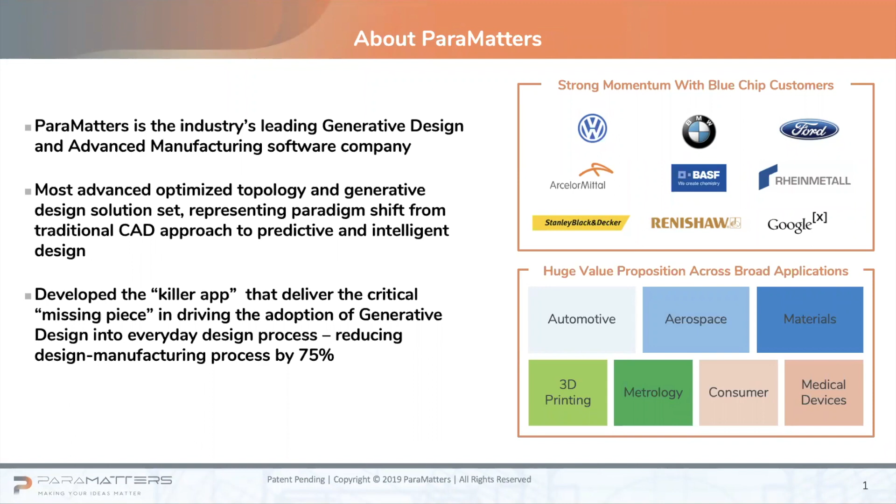We really have developed what I would call a killer app, the missing piece for enabling adoption of generative design. We're going to present today the benefits organizations are seeing from generative design. But what's really amazing is that there's still not enough adoption. I think the root cause has been the fact that there really hasn't been a solution for generative design until today.

A little bit about our team. We have a bunch of smart people, a lot of PhDs and people that come from the industry. We have people from Altair, Dassault, Ansys, Onshape, MSC, and more that really came to Paramatters to focus on generative design and building the best tool.

We have a number of different publications and citations. We are considered the thought leaders in generative design.

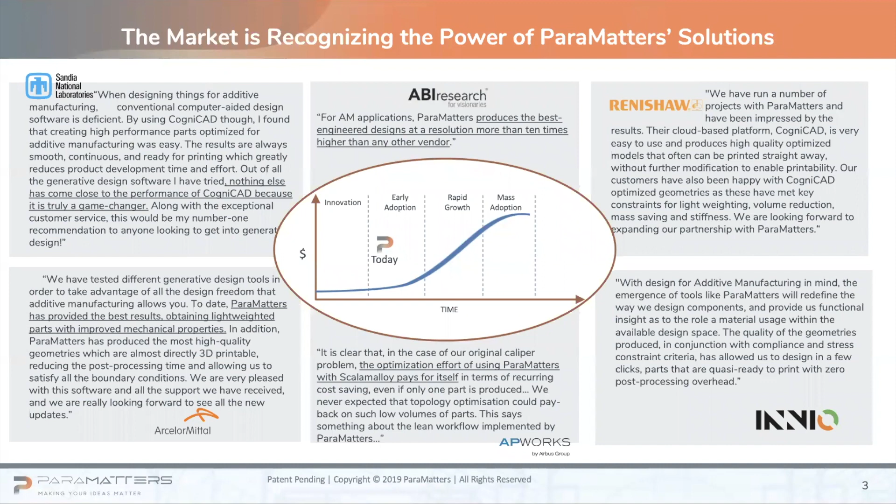We have a number of great customers saying great things about us in terms of what we've been able to do and accomplish with generative design. And we're hopefully going to show you that today.

So you really can't ignore generative design. I've read a lot of articles and been to a lot of presentations where organizations are saying, well, it's coming, this is the future, but it really is today. If you look at some of the analyst reports, they're saying generative design is going to have a compound annual growth rate of 24% over the next 10 years. That's amazing. Reaching a total of 44 billion plus by 2030 and 16 million users.

So in other words, you can't ignore this any longer. This is something you have to incorporate into your design and product development process. The results are too amazing between cost reduction, weight reduction, development time reduction, better yield on manufacturing. What's really interesting is that initially organizations were talking about topology optimization, which added certain value, but there really wasn't a lot of adoption with that.

Generative design is different because it actually creates iterations and variations of designs that can actually be manufactured. That's important, that it takes that design for manufacturability element into consideration. And they're actually designs that you can produce.

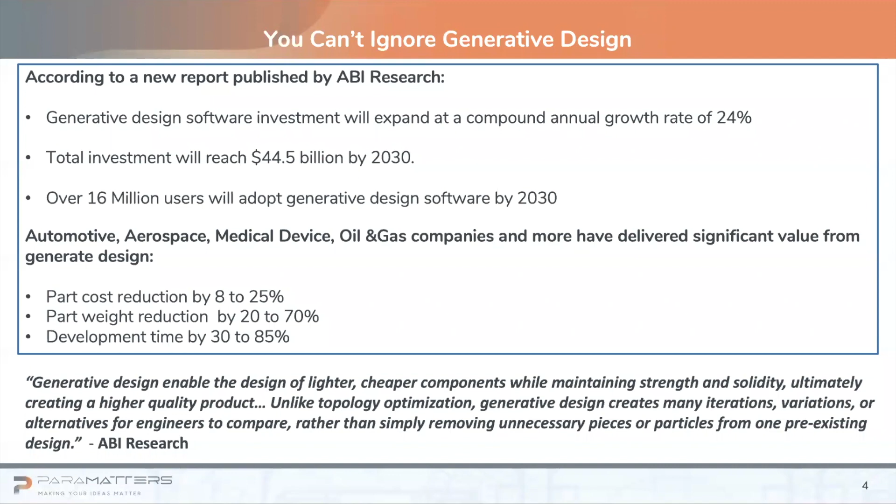So if you look at what engineers and designers are able to do with generative design, they can put in their functional requirements, physical size, material strength, weight, heat, load and boundary conditions, dynamics, et cetera, into consideration, as well as a manufacturing process. They can also consider other constraints, such as cost, availability of material, even supply chain constraints. And that's really important given today's environment.

So the fact that you're able to take all that into consideration, leveraging the technology to help you think through that, this is really a very symbiotic relationship with the engineer designer and the tool. The tool can't function on its own, it really needs the input from the designer to be able to make it work.

But really the end result is that you're able to test new shapes and geometries very quickly, do different types of parameter studies, easily come out with detailed designs for engineering and manufacturing. And not just for new designs, we're seeing a lot of applications where organizations can do product improvement, take existing designs and figure, okay, can I lightweight this? Can I use a different material type to manufacture? Can I manufacture in a different way to reduce cost? So it's not just on new designs.

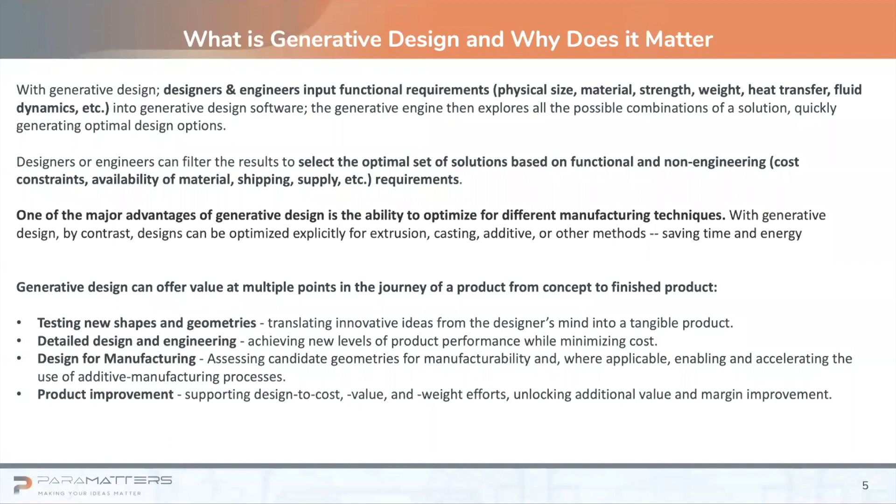Some of the value that's being derived from generative design is being able to use less material, less energy, in additive manufacturing and other manufacturing processes. You can do a variety of different design studies, varying different parameters, including materials, which is one of the parameters we're going to show you today. And basically, transforming the productivity of every engineer in the organization.

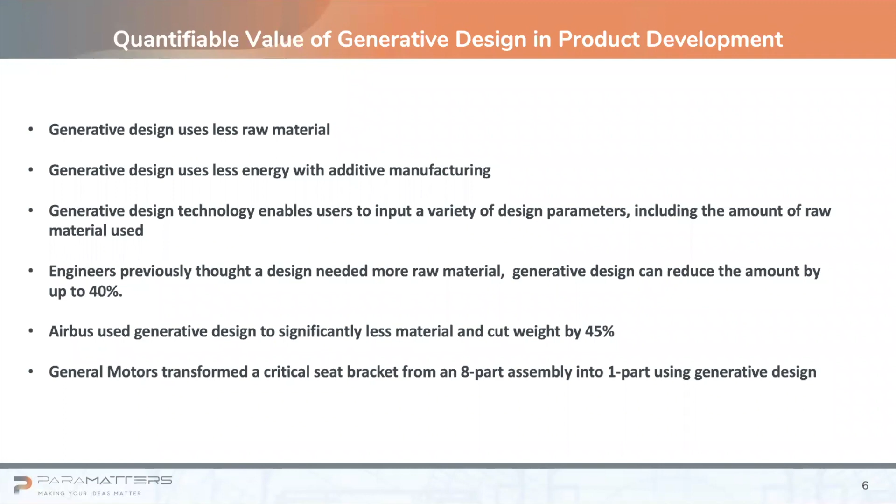Some examples: Airbus used generative design to reduce material and cut weight by 45%. GM took a seat bracket, an 8-part assembly, and cut that into one part. We'll go into a little more detail in the next slide.

Here's an example: a seatbelt bracket made up of 8 parts from 8 different suppliers. GM was able to use generative design to turn it into one part, which could come from one supplier, making it 40% lighter and 20% stronger than the original. Those are really transformative results.

Black & Decker took an overhead tool that was heavy and reduced the weight by 20%, taking the manufacturing time from a month down to 20 hours. GE took a bracket and reduced the weight by 75% while maintaining structural integrity. So these are the type of transformative results that can be achieved with generative design.

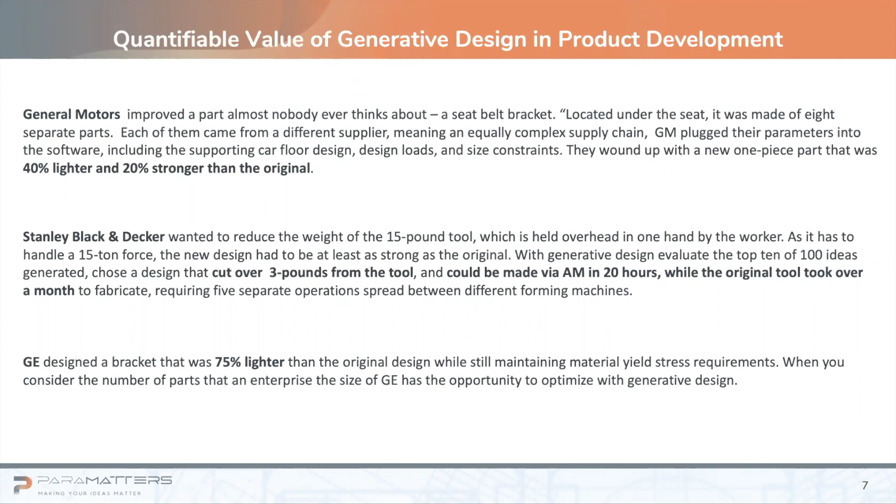Here's some other examples of parts and components that have been optimized with generative design, and some of the results.

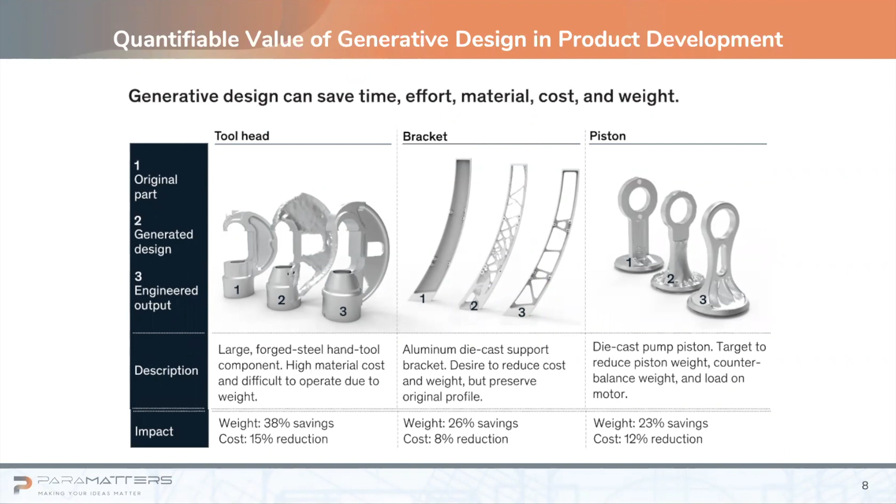So it's really a must-have solution. It's one of those things you just can't ignore anymore. And it's not just us saying this - it's industry experts, ABI, McKinsey, where it's going to allow you to improve sustainability and profits, and explore different designs and materials in a very unique and powerful way.

It streamlines the design through manufacturing process. In other words, because you're taking manufacturability into consideration, as well as the loads and boundary conditions and structural integrity, this truly enables engineers to think about designs in a different way, considering manufacturability and structural integrity together. You're seeing as much as 80% productivity gains in product development.

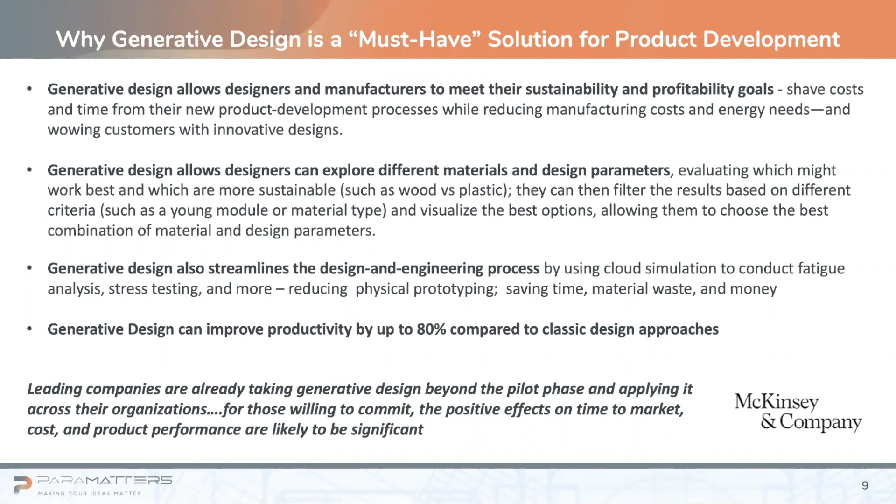So why hasn't this been adopted more widely? Mostly it's because the tools out there have been more centered on traditional simulation and traditional topology optimization, since that's the providers' core technology. So it was really hard for them to think about generative design in a unique way - they had to build off their existing technology base, which really wasn't built for generative design.

So ParaMatters and CogniCAD is the first solution designed for generative design, incorporating AI and machine learning algorithms to enable geometry optimization combined with structural integrity and manufacturability. It's intelligent, automates a lot of the steps, so it's very easy and intuitive to use. It integrates design and manufacturing, and it's CAD and CAE agnostic.

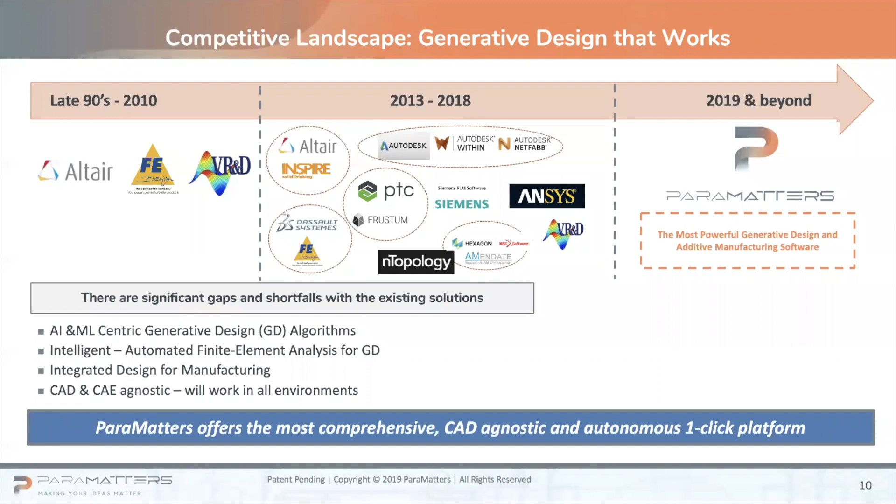In other words, you don't have to change your environment - you can work with the tools you have today, and this is an add-on that gives you that generative design option.

So what's in it? Basically, we have structural, mechanical, static and vibration simulation, along with thermal, taken into consideration as you're creating your design. This happens in parallel with developing the geometry. You could basically take any geometry from the CAD model and apply generative design to it.

Again, it's CAD agnostic - it can be an existing part that you now run through generative design, or it can be a lump model where you say, here's my loads and boundary conditions, here's my design objectives, go figure this out for me. So it can work in a variety of different ways.

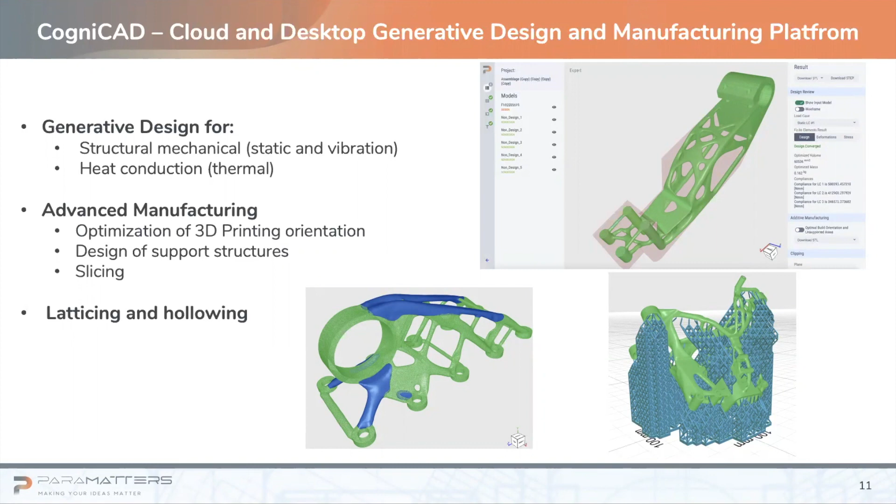It's designed to take advantage of advanced manufacturing, and enables advanced manufacturing in terms of lattice and structure support.

Going into a little more detail, you can see some examples of how it works on the right. As I said, AI and machine learning algorithms incorporate structural vibration and heat conduction. It's a pure mathematical approach, and Michael will talk a little more about that when he shows you the example.

It's very lightweight, providing this type of capability in simulation very, very quickly. We've done generative designs live during a demonstration in 30 minutes or less. That's another unique element to this - it's not a heavy duty application, it was built to be fast, lightweight, and smart.

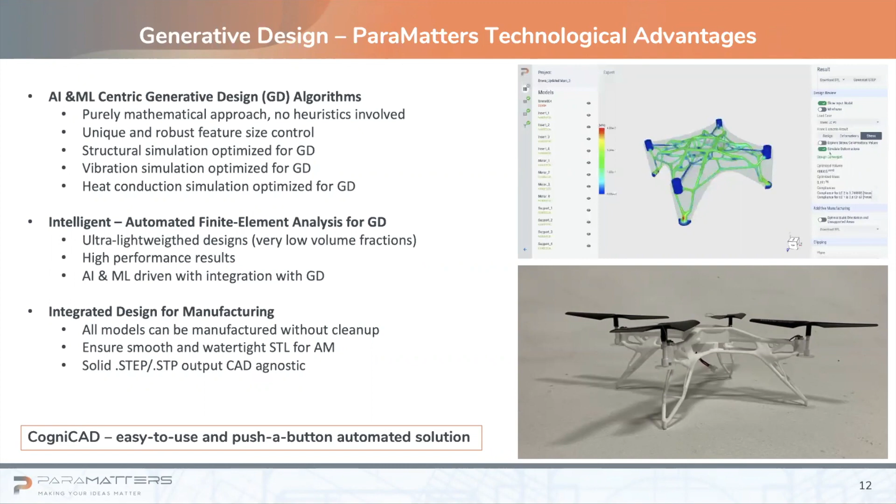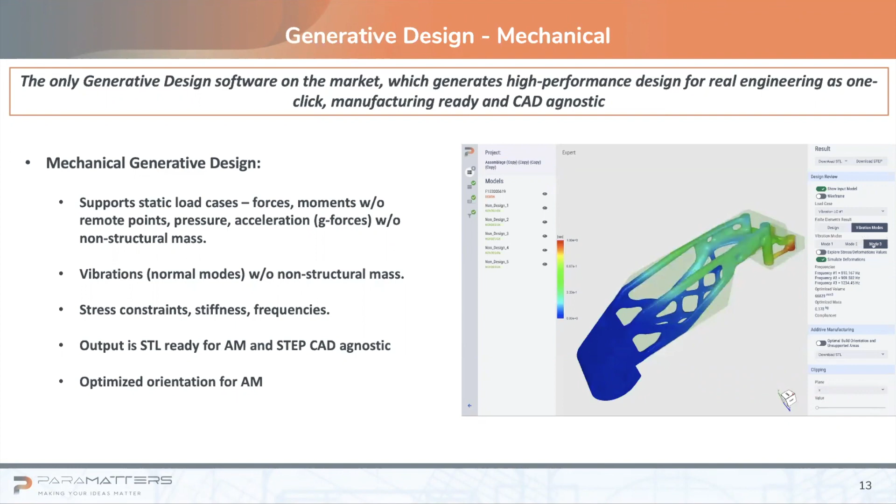Going into more detail in terms of what it does with the structural piece, it can also output for manufacturing, whether it's a step file or STL for additive manufacturing. If you have additive manufacturing, it's really designed to be optimized for that.

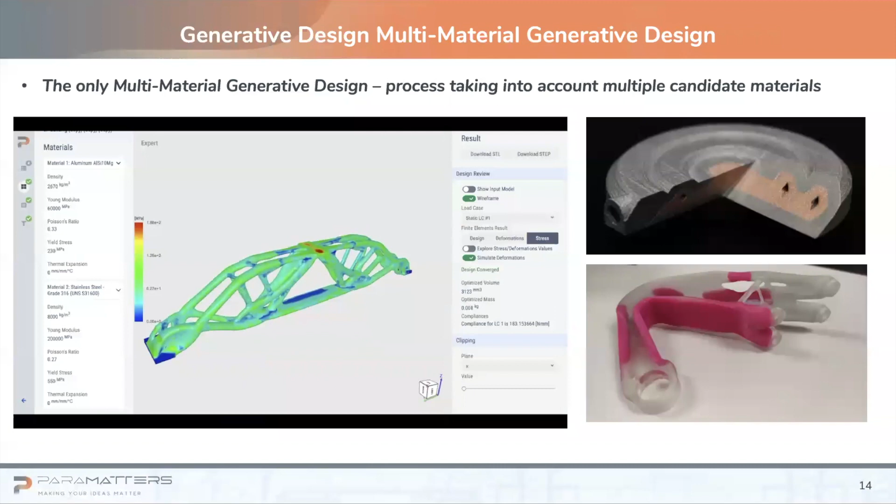The other thing is that we take into consideration multiple materials, which is unique. No one else is doing that. So this way, if you're incorporating designs and want to get creative, you can apply different material types into your model, and we're able to solve and design for that. Again, very unique, very powerful.

As I mentioned, we have additive manufacturing, where we can produce the models for additive manufacturing, output to an STL or PLY file, and build the lattice structures and support structures automatically. It's really designed to optimize that as well, so you actually reduce the material requirements of your additive manufacturing solution. But we also support other manufacturing operations as well, not just additive.

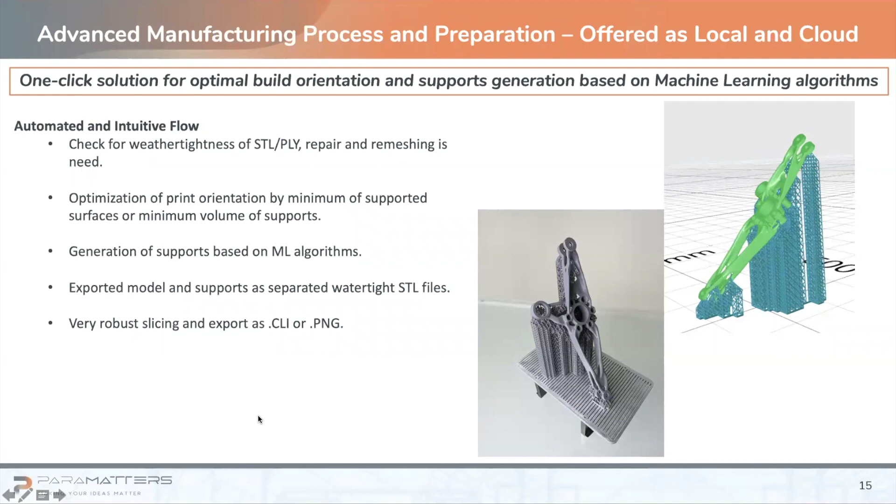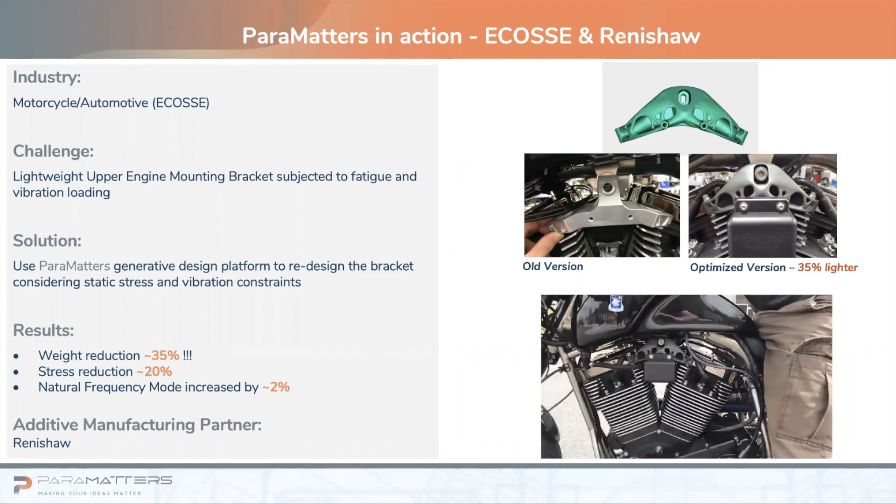Just getting into a couple examples, and then I'm going to turn it over to Michael to show you exactly how it works. This is a redesign of our bracket for ECOSSE, where they wanted to lightweight a mounting bracket and think about fatigue and vibration loading as part of the design consideration. They were able to reduce weight by 35%, stress reduction of 20%, and the natural frequency mode, they actually increased that as well. The part was produced by Renishaw.

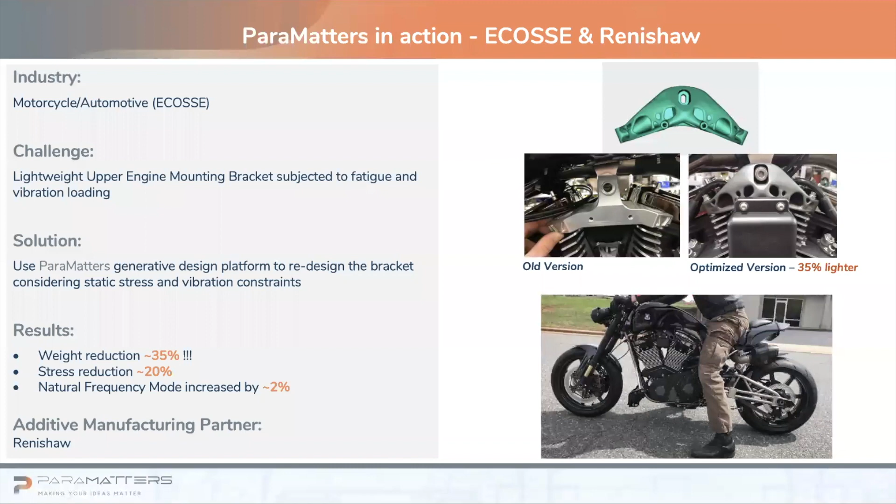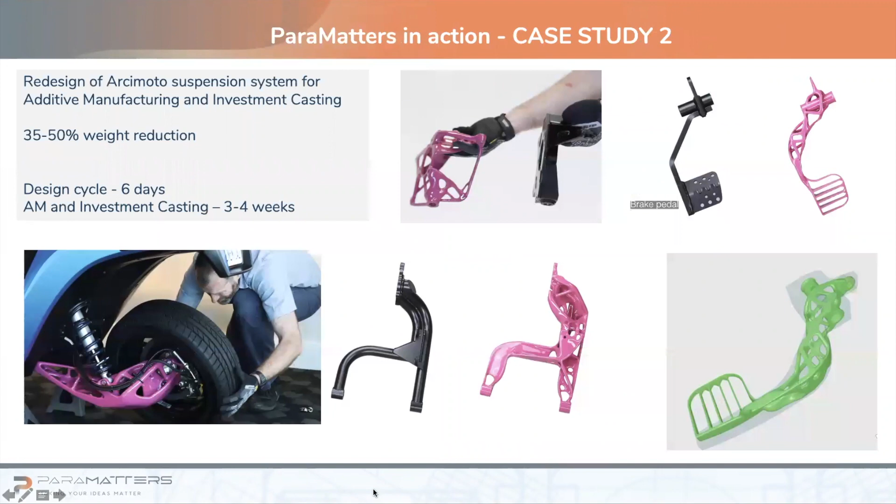An example where we took a suspension system, cut the number of components in the suspension system, reduced the weight, reduced the design cycle by over a week, and produced this for investment casting.

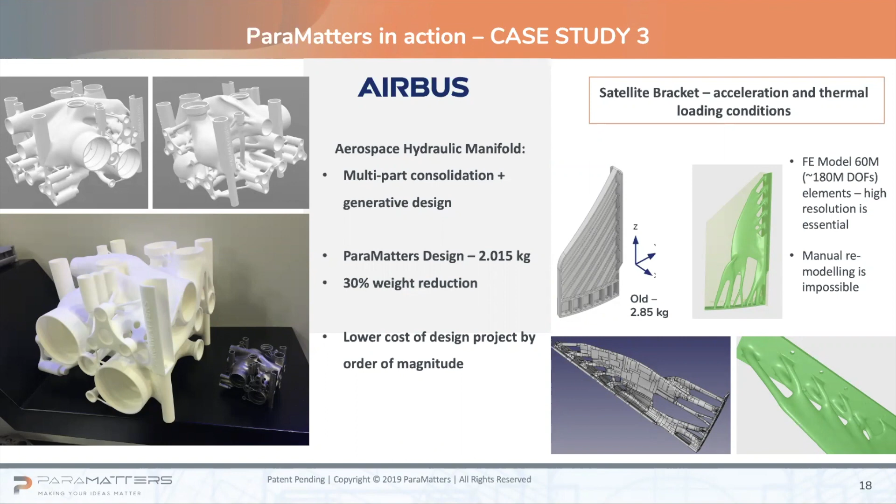Here's an example from Airbus where they're doing a hydraulic manifold. They want to do part consolidation here as well as lightweighting. Obviously, structural integrity was important, so they had to maintain that, and they're actually able to lower costs of the design as well.

At this point, I'm going to transition over to Michael, and he's going to take you through a real example of one of our customers and how we transformed one of their machines. Michael? Yeah, thanks Ed, good morning everybody.

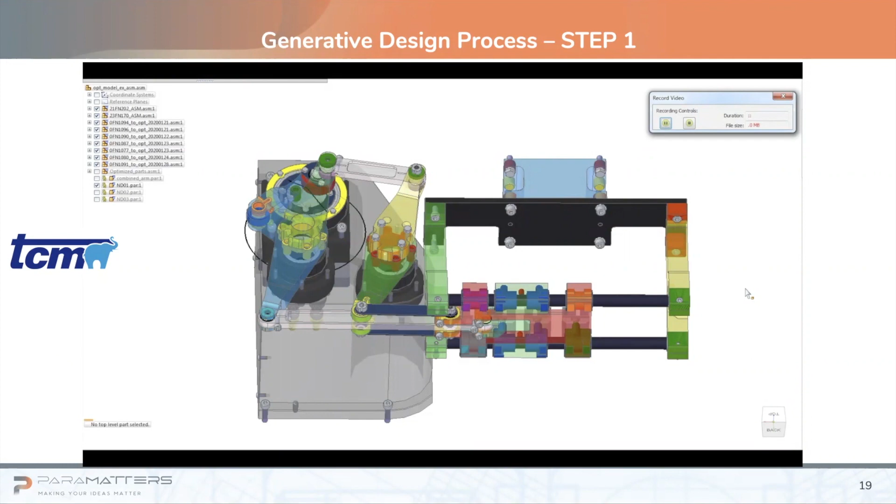I would like to show the unique process taken from the machinery industry with our customer TCM, an Italian machinery company. To briefly explain what happened here, we got an assembly of the machinery, and we immediately identified many candidates here for generative design. When we talk about generative design, as Ed mentioned, it's not only lightweighting, it's also part consolidation when we combine generative design with additive.

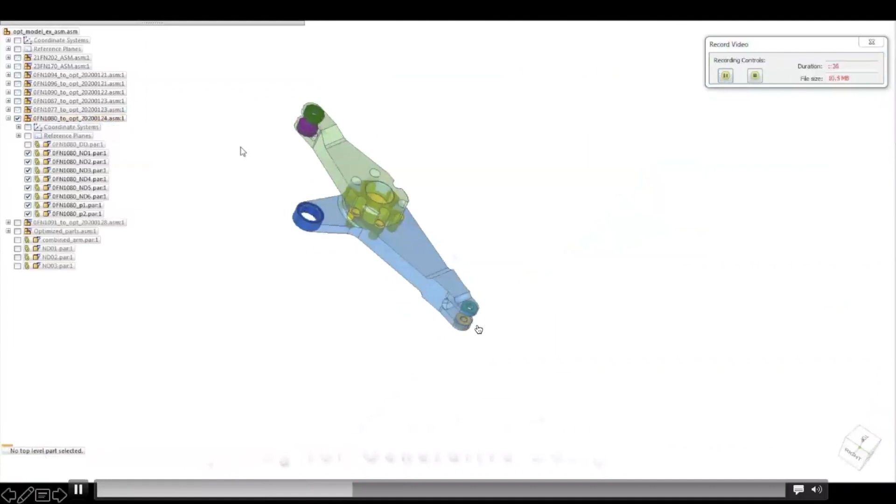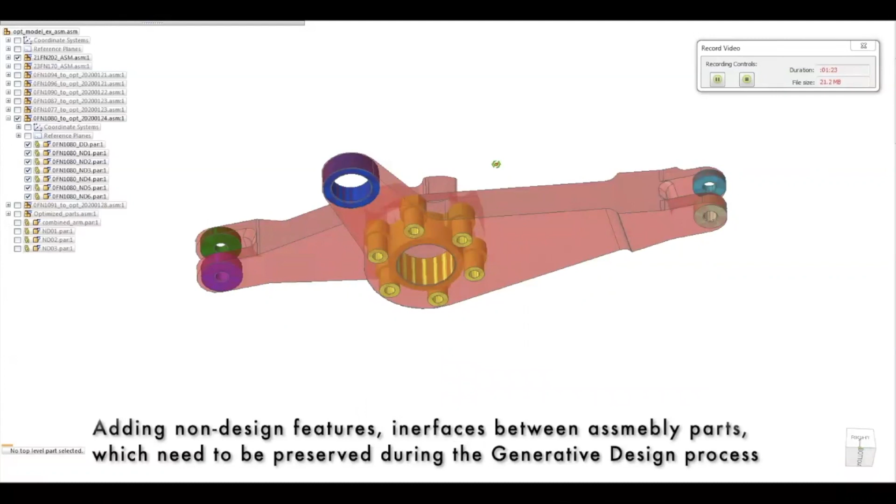Let me quickly jump back here. We identified, for example, these two components, and it's clear that instead of having two parts, we consolidate them. In CAD, this is a very simple operation. We can create what we call a design space. Now, what is also important in generative design, each part or component we design is part of an assembly, so we need to keep interfaces untouched - what we call non-design.

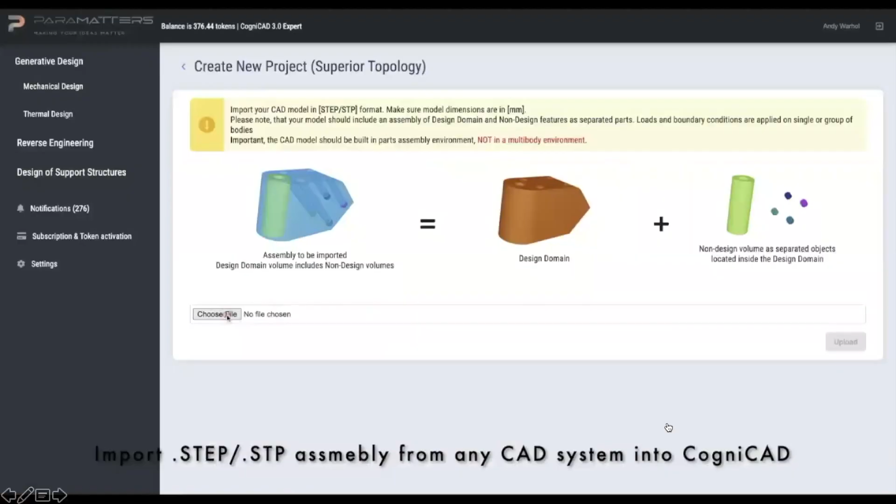So basically, the user has to take his CAD and import it as a STEP file into our process - very simple. After that, you go to CogniCAD. This is the CogniCAD interface, our software, and you just import this STEP file assembly into our platform. The process is very intuitive and easy to use.

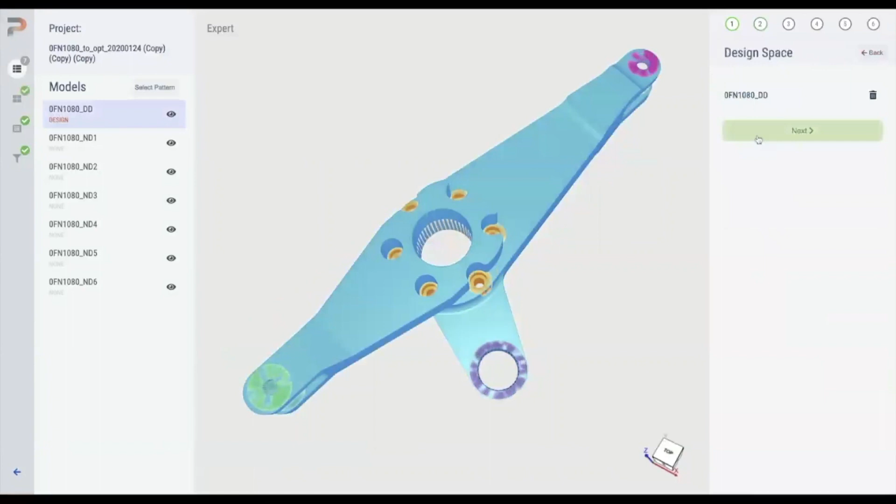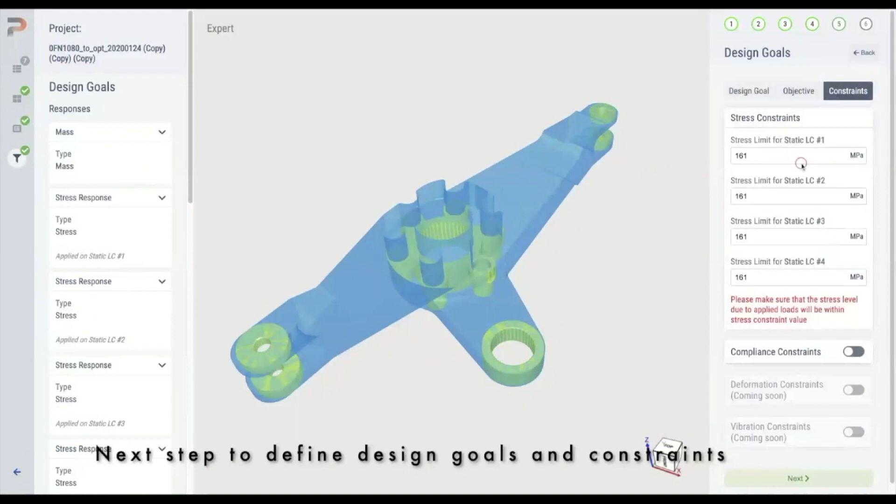Let me just stop it here in the show. There are very intuitive steps. First is to define the material type we would like to use, with basic parameters. Then classification of the design space, some non-design features - basically what we want to keep untouched by the process. And we apply various loading conditions. As Edward mentioned, this can be static, free vibration modes, or other load cases like thermal. When we talk about loading conditions, these can be forces, moments, pressure, acceleration loads, and so on.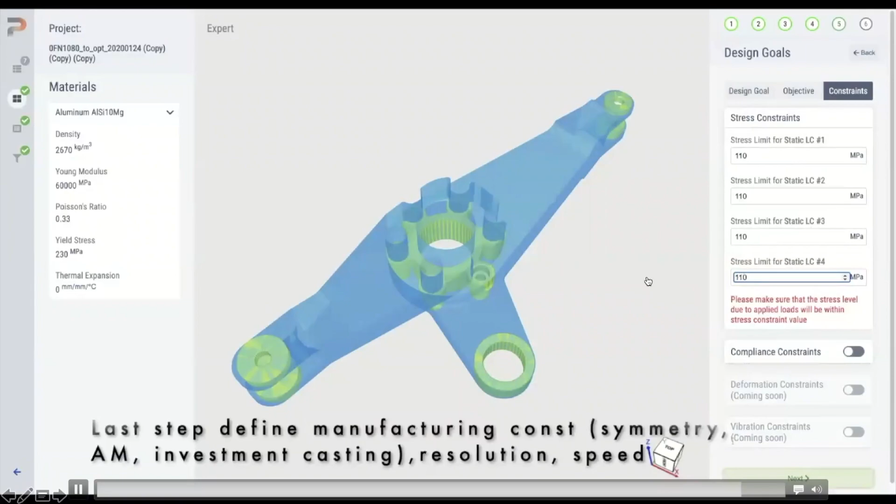And the design goal, which we would like to define in this case, is to say okay, if this part is made of aluminum, we want to keep stresses below yield stress, or if it's a fatigue application, we would like to have some safety factor. For instance, we put a safety factor of 2 here, and we define our requirements, and the software provides the final design as you see here.

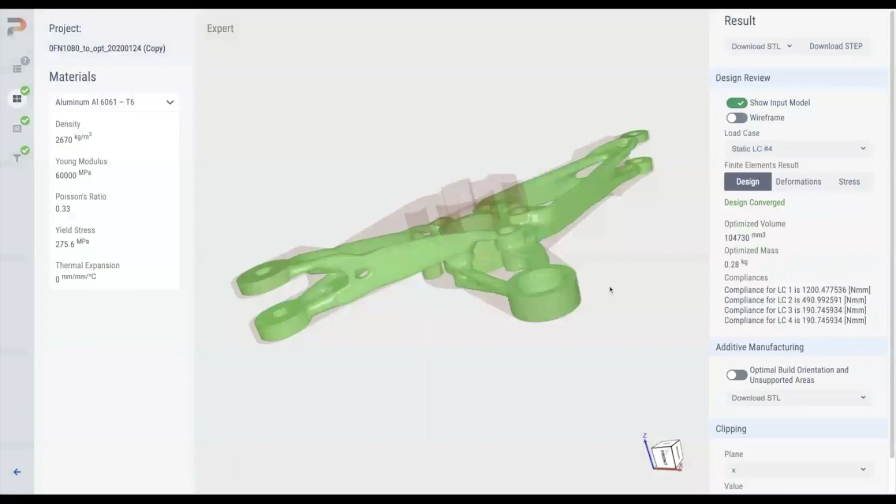It is smooth, it is watertight modeled, which does not require any manual post-processing, any sculpturing or reconstruction of geometry, which is very tedious. The software provides a lightweight design backed by finite element analysis, of course, and we can see our design, including the FEA, which includes deformations and stresses.

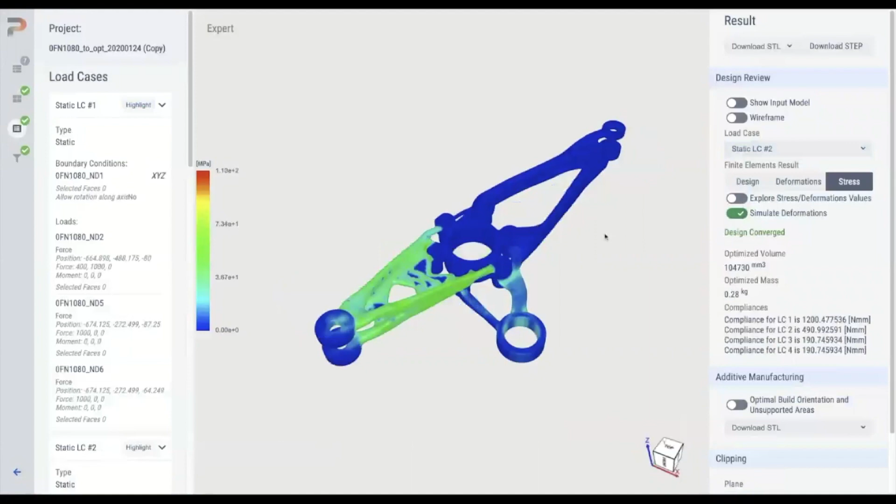We typically consider von Mises stresses. So if we change material, for instance, from aluminum to steel, the design should be different because the material is stiffer and stronger. So you will see now, this is a design for steel. It has less volume. We can allow higher stresses here, and of course the design looks different.

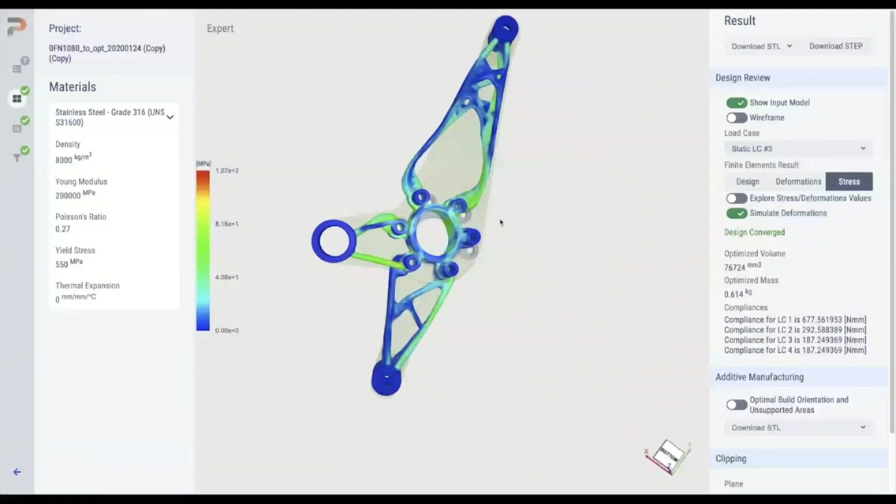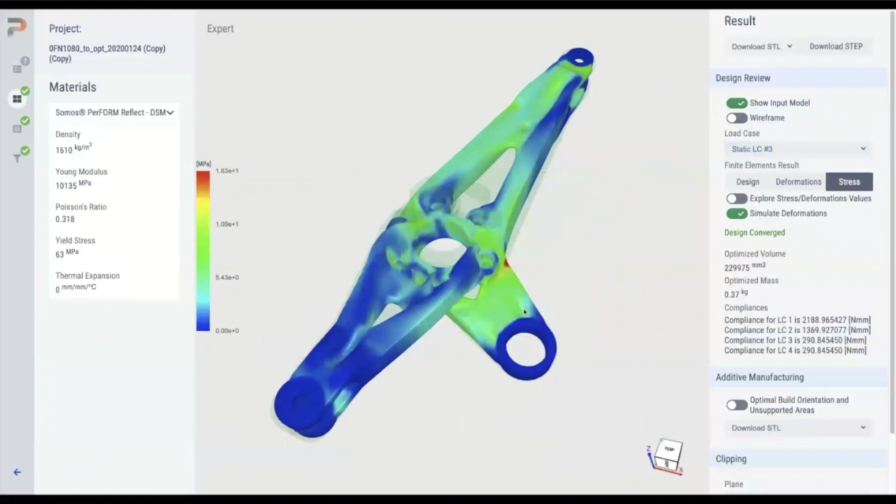So you see generative design is really an intelligent way of design, taking physics into consideration. Here we considered the same part in plastic, a pretty stiff plastic produced by DSM. And we see again the part has higher volume, but this part has lower stresses, and we can allow lower stresses. So we can really vary different materials here.

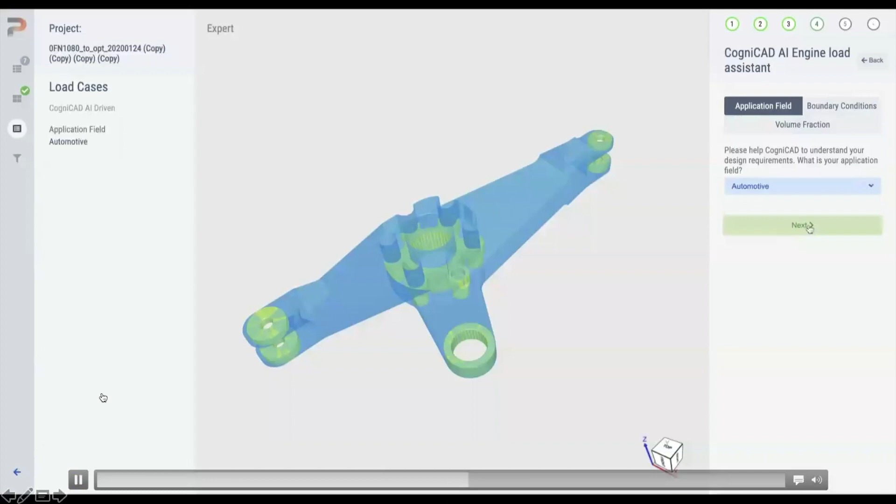Now, for those of you less familiar with finite element settings, not knowing how to apply loads, for industrial designers we've developed an additional procedure for when you don't really know the loading condition or are less familiar with the finite element setup, and you'd still like to have organic and nice designs. This is a functionality where a user can just select the application field, the boundary condition, and the volume fraction of material, and run the study. There's no need to define any loading.

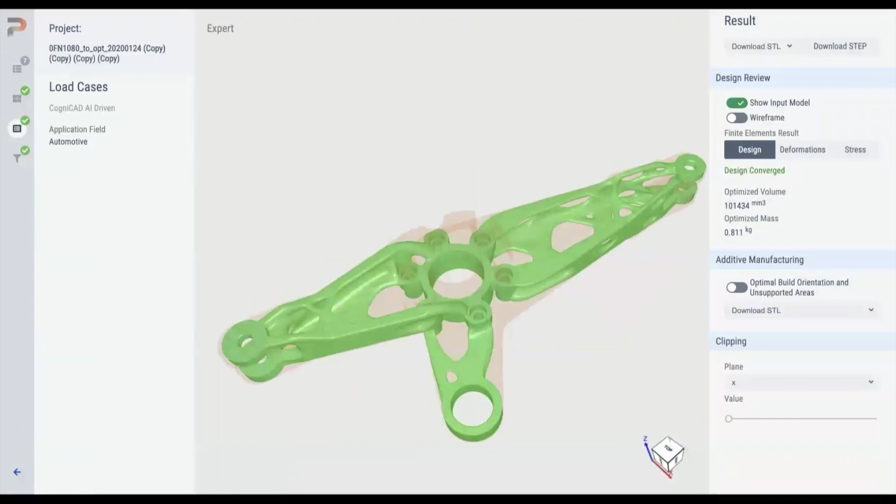And this is a result for this case. You see, the part is pretty much organic, nice, and makes a lot of engineering sense as well. So even without knowing the loading condition, you're able to get very high quality designs.

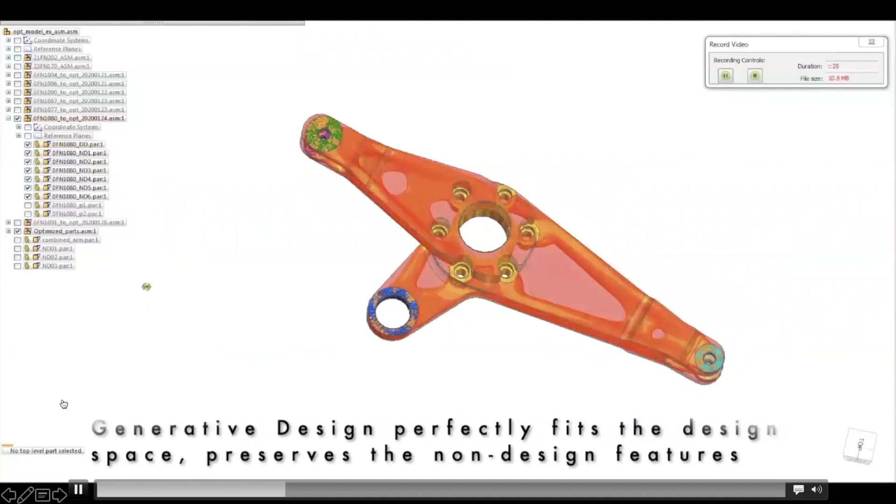So once we have generated our designs, we can bring them back into the assembly, and you can see how the model fits exactly the design space which we initially defined. It preserves all the interfaces and non-design regions perfectly, and it's really ready for manufacturing.

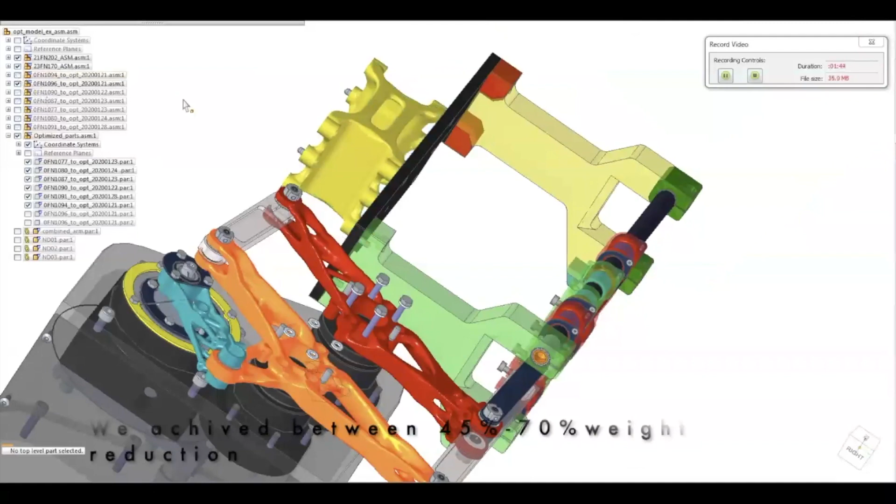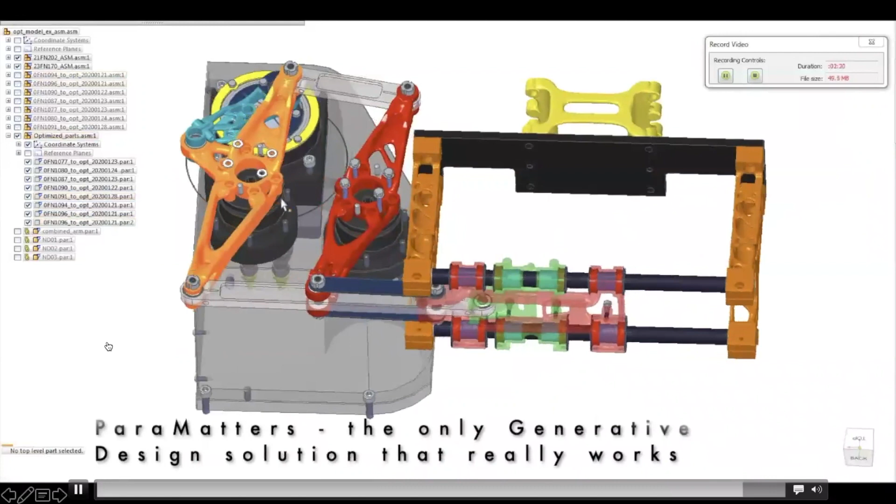So if we look at the whole component, in this project we designed many parts the same way. What's nice here is that 7 parts were generated within less than 2 days by a single engineer. This shows how effective our flow is, since there's no need for any manual post-processing or manual manipulation. The software provides the final design as is, and on average we could achieve lightweighting between 45 to 70% in each part.

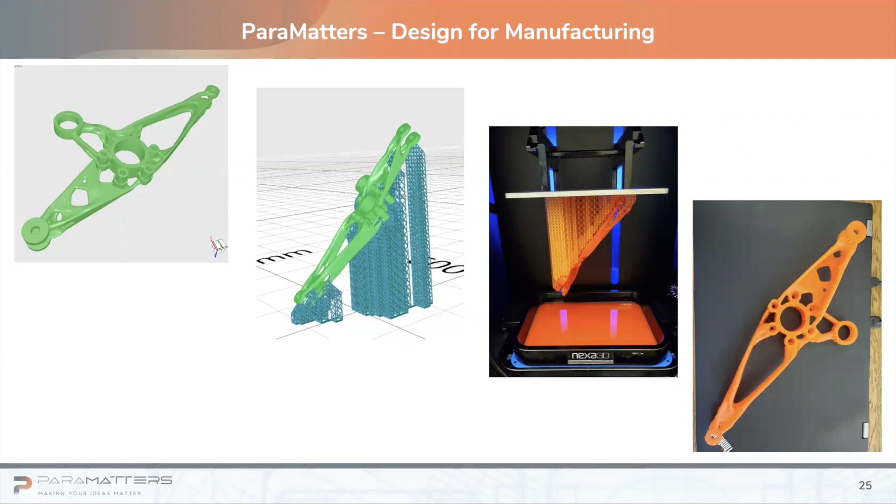It's very important that we don't just generate a nice shape - these designs are fully manufacturable. We work closely with various manufacturing companies to make sure all designs we generate are fully manufacturable. Within CogniCAD, the design can be taken to manufacturing using our support generation capabilities as well. This part is printed and post-machined, and you see it's all fully manufacturable. So from design to manufacturing, you can get there using nearly a one-click solution.

And yeah, Ed, I will take it over to you.

Thanks, Michael. That was a great presentation, and it's amazing that you're able to go right from design to manufacturing. I've heard the NXE400 Nexa3D printer is the best on the market right now, so that's great.